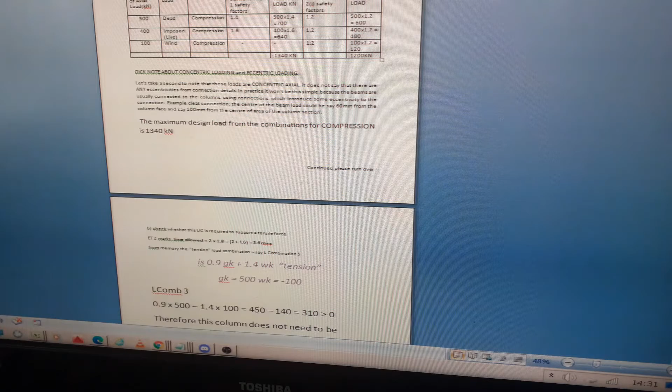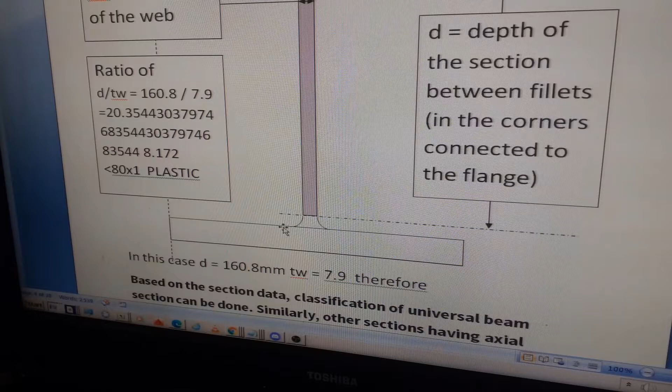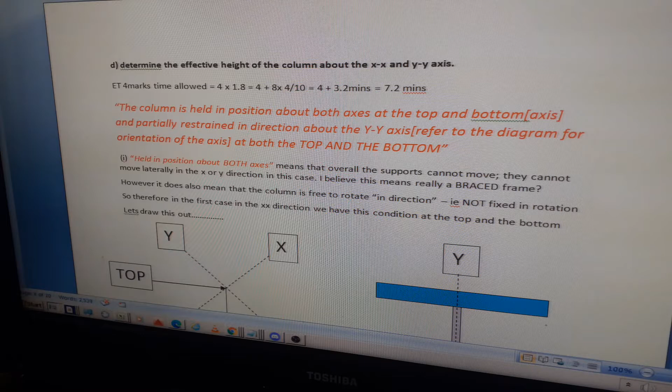Let's go down to, so this is part 3. It's part D actually now. Sorry, we've done part C in video number 2. If I can zoom in, you can see this bit better. So while I read out the text: it says, determine the effective height of the column about both the XX and YY axis.

So just in terms of the exam technique, there's 4 marks. Time allowed is then 4 times 1.8, which is 4 plus 8 times 4 over 10. That's 4 plus 3.2, so 7.2 minutes. So you've got about 3.5 minutes for each part of this question. So say 3.5 minutes for XX and 3.5 minutes to work out YY.

It's a little bit dark, but I can't put the flash on because it puts too much

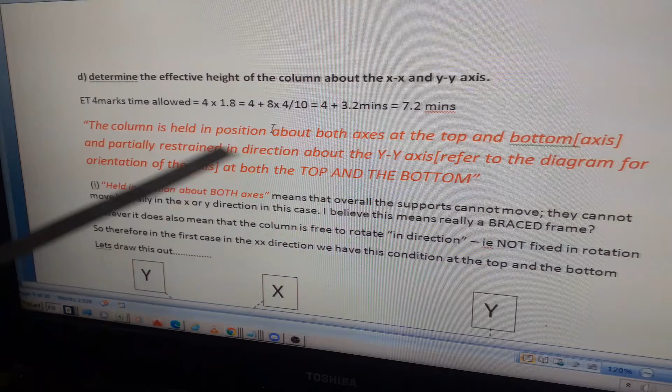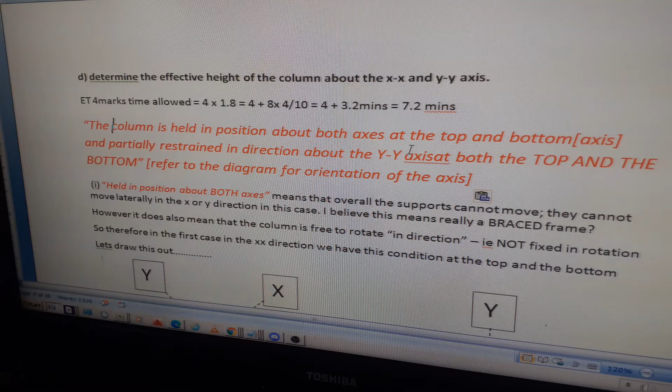reflection on the screen. So remember in the question it said the column is held in position. This is very important as well. I've referred to these diagrams in a moment. I'll just read it out again. The column is held in position about both axes at the top and the bottom and partially restrained in direction about the YY axis at both the top and the bottom.

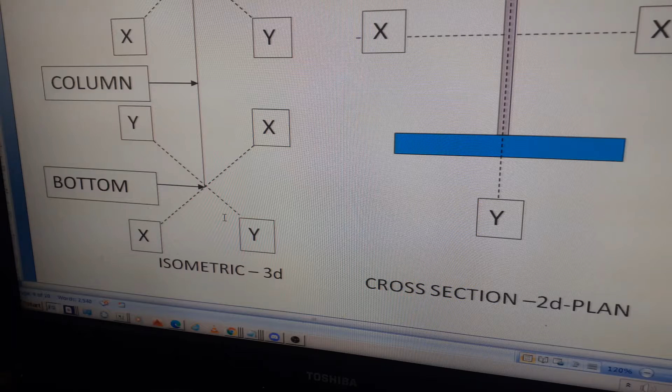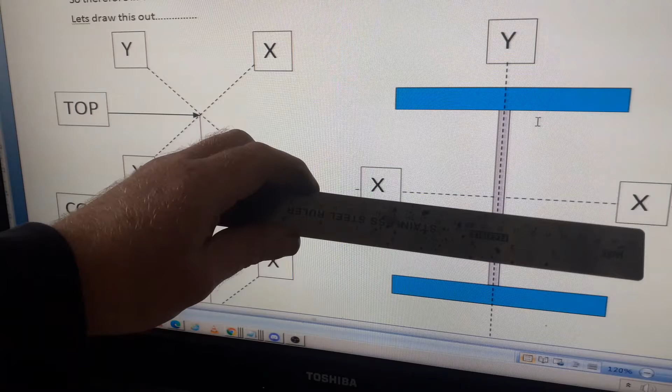Okay, I'll just read out this text and I'll zoom out a bit for the diagram. So it says held in position about both axes. As you can see, I've just drawn it out in 3D, isometric. Let's just look at the plan section here on the right hand side. It shows on the question XX is horizontal, YY is vertical. I'm just explaining the axes, but we're going to look at axial load about the XX axis first and then the YY axis second.

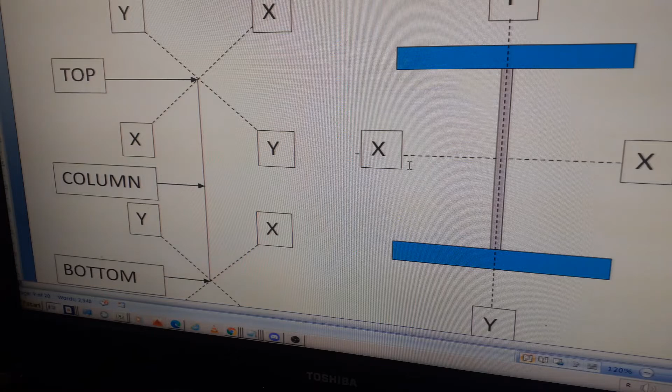So it says held in position about both axes. So this is my interpretation. This means that the supports cannot move, because held in position means it can't move. They cannot move laterally in the X or Y direction in this case. So it might be something like a braced frame, basically. It doesn't say exactly, but we know it's not supposed to be able to move laterally in the X or Y direction. Don't know about Z.

This is for both cases, but we're looking at XX first, because it does mean that the column is free to rotate in direction, not fixed in rotation. So in the first case, in the XX direction, we have these conditions at the top and the bottom: we've just got held in position at top and bottom. So about XX it is held in position at both the top and the bottom.

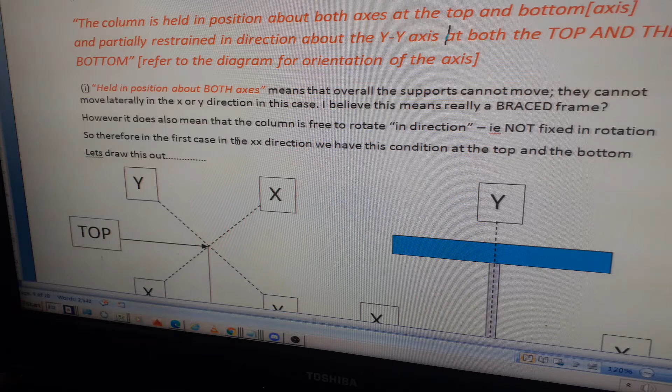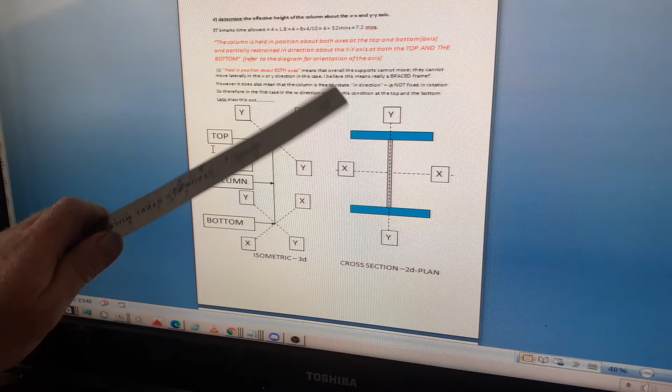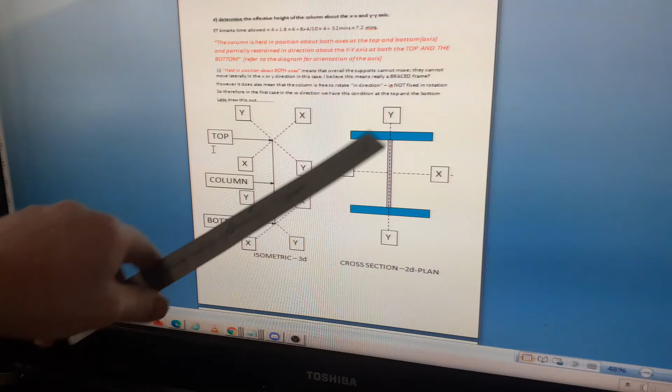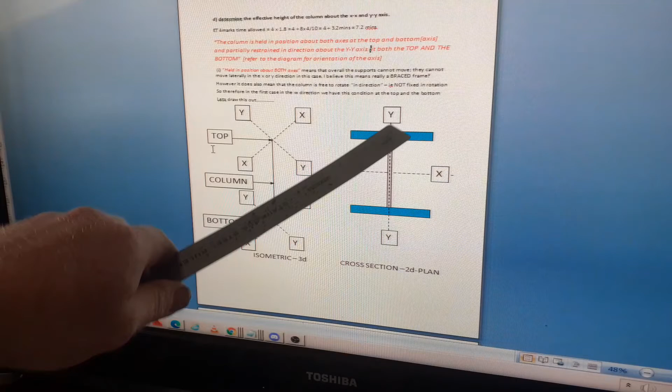Right, so zoom out a little bit. Here's the column. I tried to draw it in 2D and isometric so you can see what I'm talking about. This is the XX axis, this is the YY axis. Here's the top, there's the bottom, there's the column. This is a cross section. In the question it said XX is horizontal about the middle. The YY axis runs along the web, XX parallel to the flanges. So let's look at the little diagram I've drawn out to show what happens with buckling about XX.